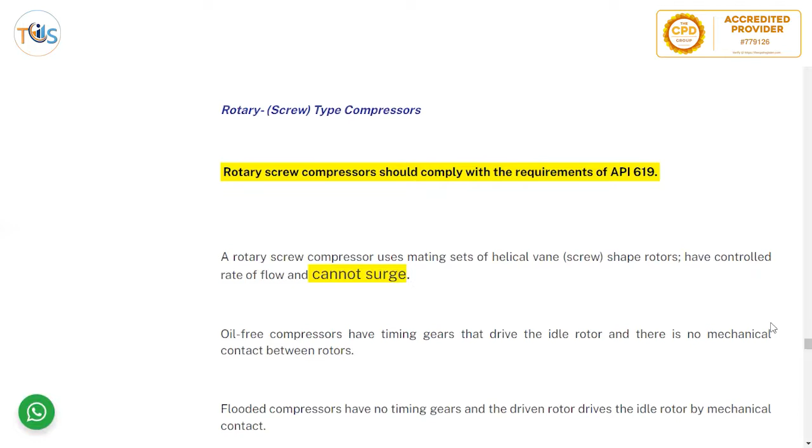Rotary type compressors should comply with requirements of API 619. A rotary screw compressor uses mating sets of helical vane or screw shaped rotors, have controlled rate of flow, and cannot surge. So this might be a potential question: what is the rotary screw compressor's standard? It's 619. And which compressor cannot surge? That is rotary screw compressors. Oil-free compressors have timing gears that drive the idle rotor, and there is no mechanical contact between the rotors.

Flooded compressors have no timing gears, and the driven rotor drives the idle rotor by mechanical contact. As you can see, there are two rotors, one male, one female. No contact between them, and known volume is moved from inlet to outlet.

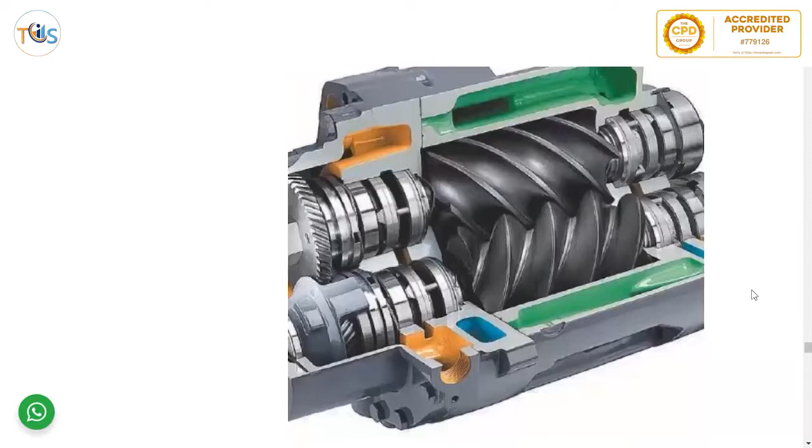And this is the cross section. There's the rotors and the bearings at both ends. Known volume is moved around, and hence it cannot surge, because even with cavitation, it works on volume, so there's no returning back. Because of no contact, there is no wear and tear.

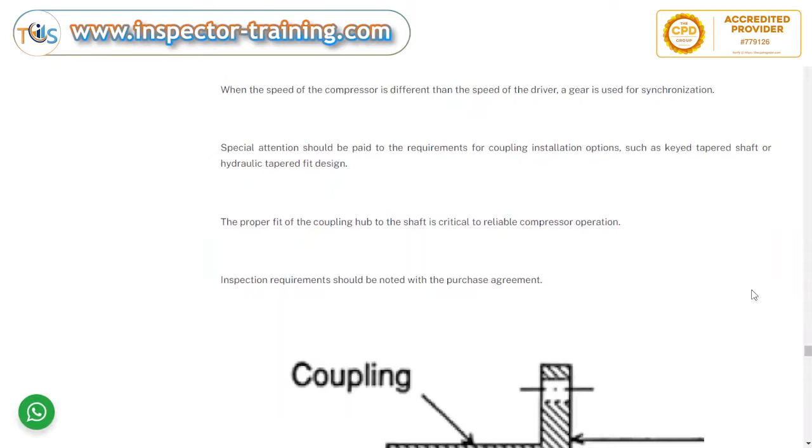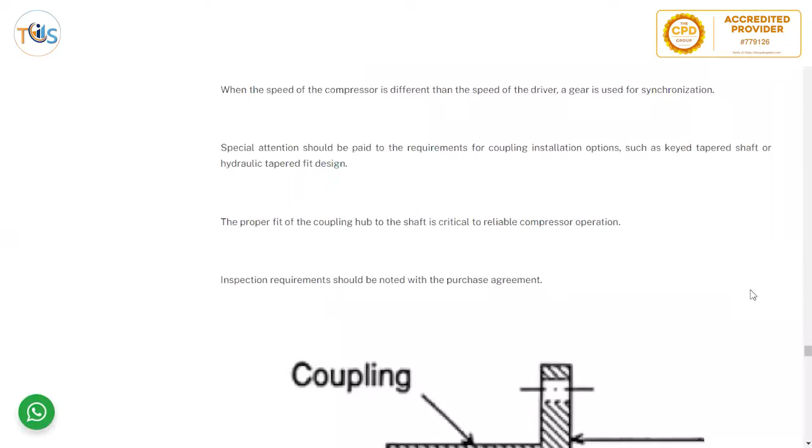Rotary compressors are driven by electric motors, gas or steam turbines, or diesel engines. When the speed of the compressor is different than the speed of the driver, a gear is used for synchronization. Special attention should be paid to the requirements for coupling installation options, such as keyed tapered shaft or hydraulic tapered fit design. The proper fit for coupling hub to the shaft is critical to reliable compressor operation. Inspection requirements should be noted with the purchase agreement.

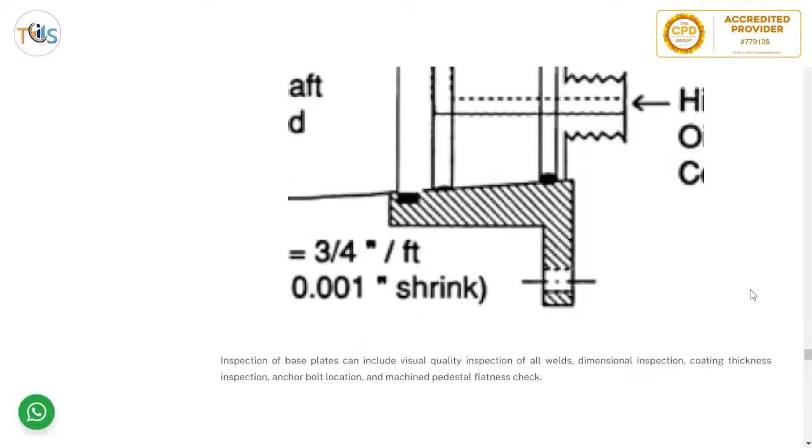So you've got a coupling here, a shrink fit. The inspection of base plate can include visual quality inspection of all welds, dimensional inspection, coating thickness inspection, anchor bolt location, and machined pedestal flatness check.

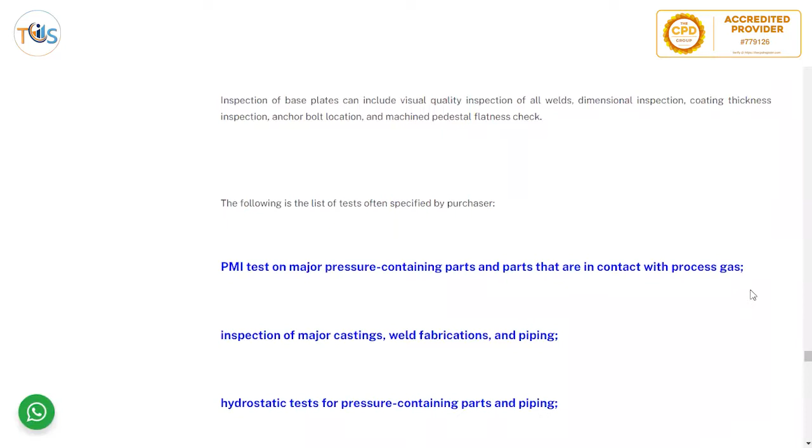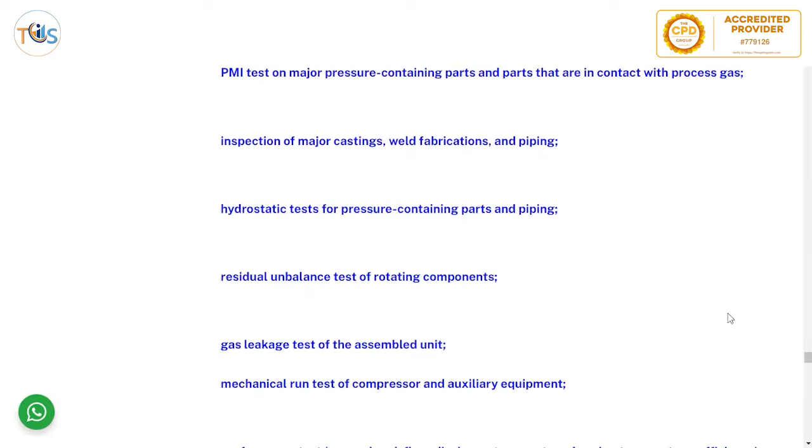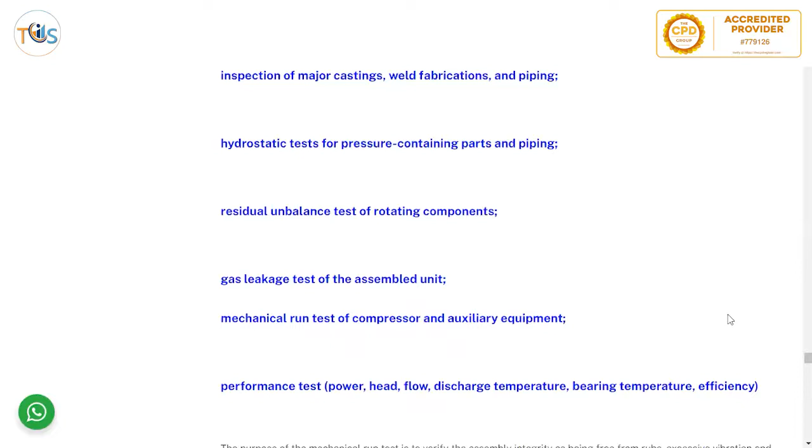The following is a list of tests that can be specified by purchaser: PMI of major pressure containing parts, inspection of major castings, weld fabrication and piping, hydrostatic test for pressure containing parts and piping, residual unbalance test of rotating components, gas leakage test of the assembled unit, mechanical run test of compressor and auxiliary equipment, and performance test: power, head, flow, discharge temperature, bearing temperature, and efficiency.

The purpose of the mechanical run test is to verify the assembly integrity as being free from rubs, excessive vibration and noise, lubricant leaks, and overheating. The source inspector will typically observe the run test in accordance with the agreed test procedure. The source inspector should verify that the results of tests are correctly documented.

All required vendor documents are typically submitted according to VDDR, vendor drawing and data requirement, and reviewed and approved by purchaser.

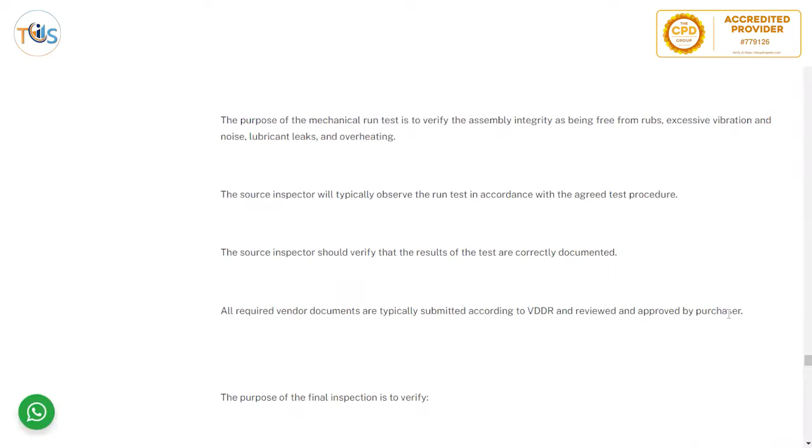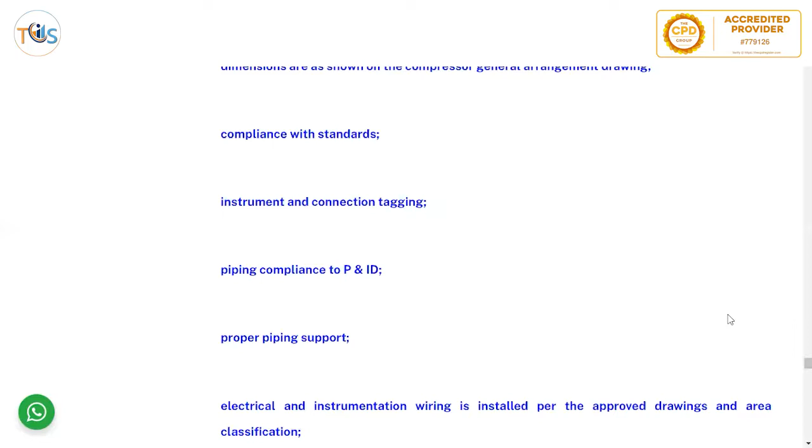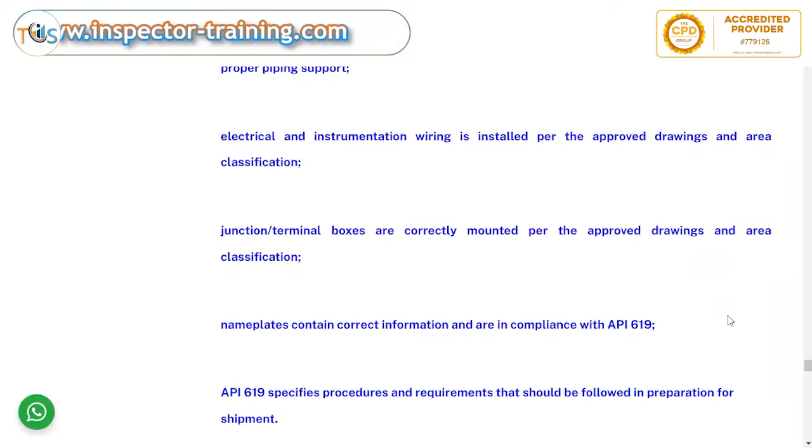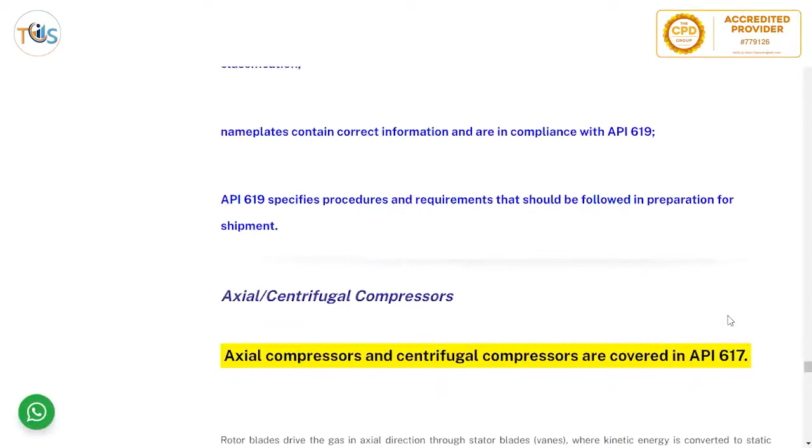The purpose of final inspection is to verify dimensions are as shown on the GA drawing, compliance with the standard, instrument and connection tagging, piping compliance to P&ID, proper piping support, electrical and instrumentation wiring is installed per the approved drawings and area classification, junction terminal boxes are correctly mounted per the approved drawings and area classification, nameplate contains correct information in compliance with API 619, and API 619 specified procedures and requirements that should be followed in preparation for shipment.

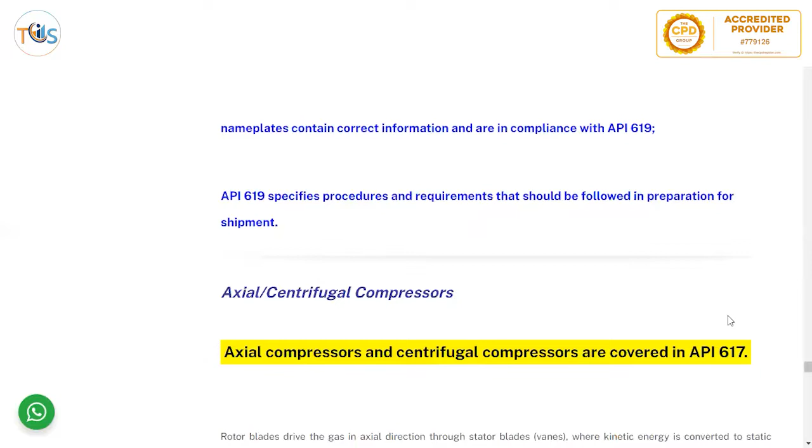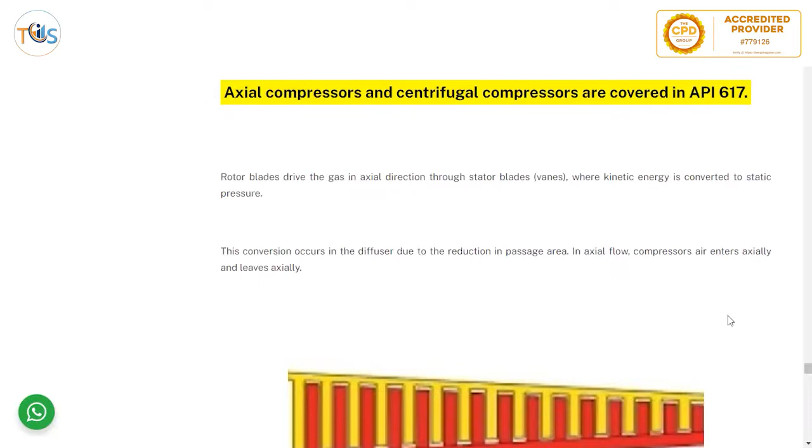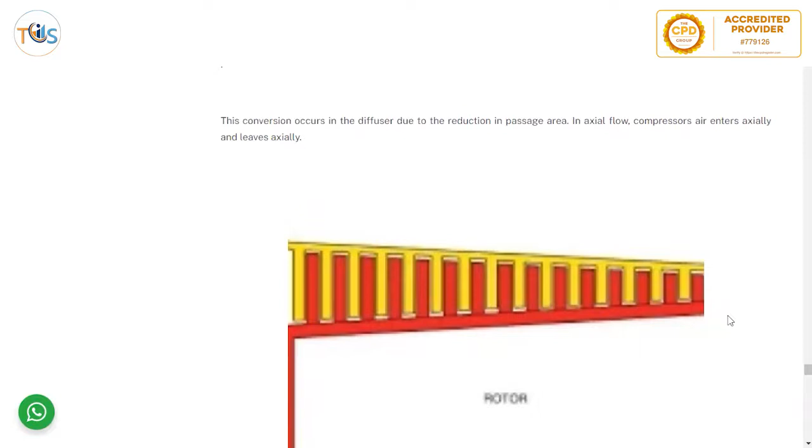Axial centrifugal compressors are covered in API 617. Rotor blades drive the gas in axial direction through stator blades, where kinetic energy is converted to static energy, pressure. The conversion occurs in a diffuser due to reduction in passage area. In axial flow, compressor air enters axially and leaves axially. So as you can see, it comes in, and because there is a reduction in the area, the pressure increases as it moves through.

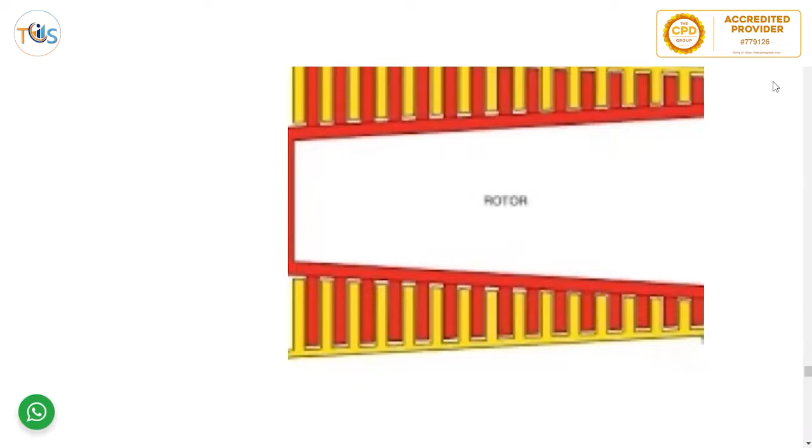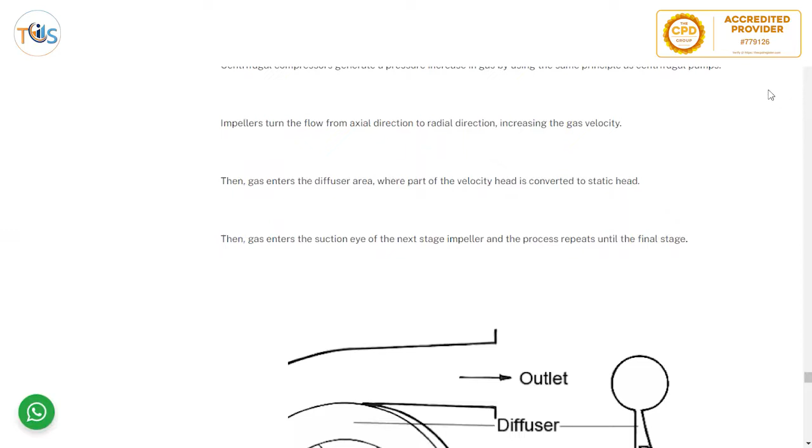So these are the blades. Centrifugal compressor generates a pressure increase in gas by using the same principle as centrifugal pumps. Impellers turn the flow from axial direction to radial direction, increasing the gas velocity. Then gas enters the diffuser area where part of the velocity head is converted to a static head. Then gas enters the suction eye of the next stage impeller, and the process repeats until the final stage.

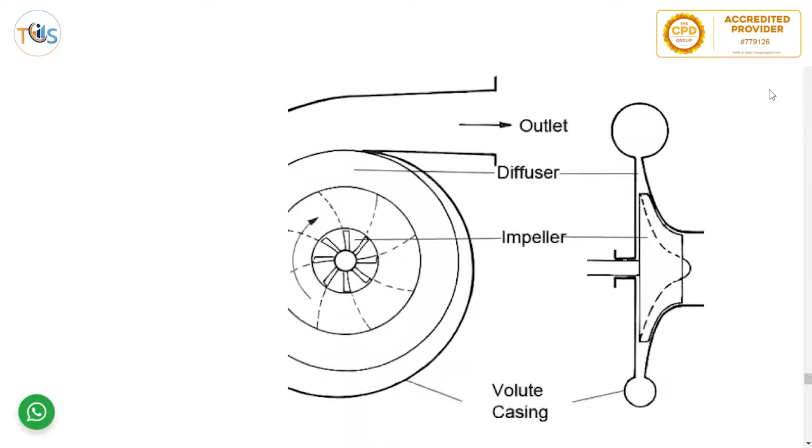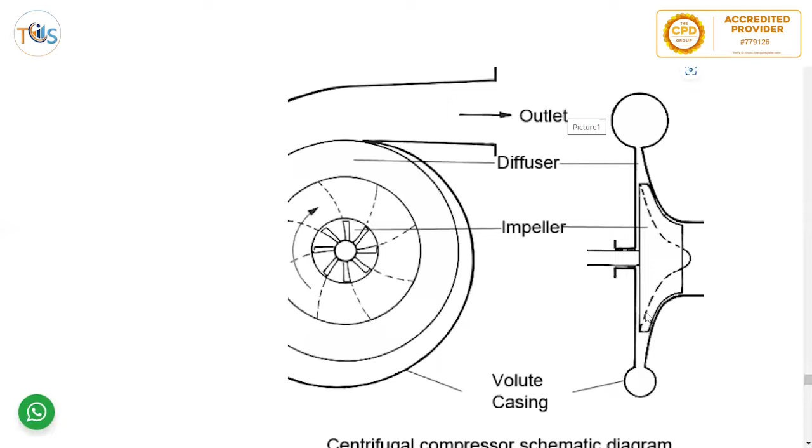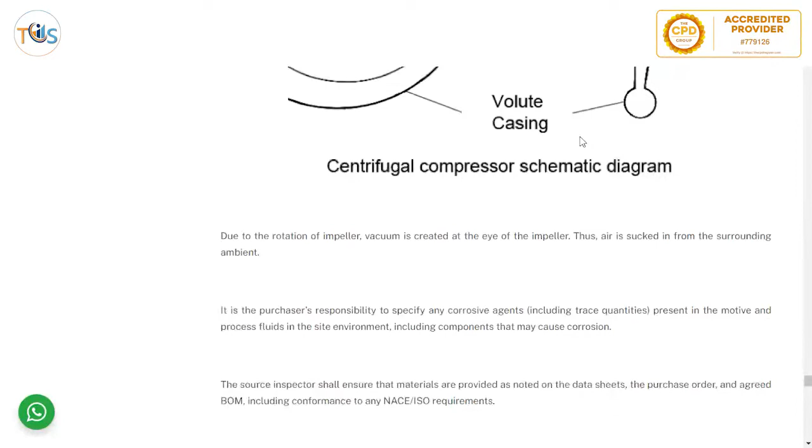So you can see here, you're actually giving velocity to the gas by turning this centrifugal impeller, and by increasing the speed of that, you're giving it some energy. Now, that energy turns into head or pressure. Due to rotation of the impeller, a vacuum is created in the eye of the impeller, thus air is sucked in from the surrounding ambience. It is the purchaser's responsibility to specify any corrosive agent, including trace quantities present in the motive and process fluids in the site environment.

Including components that may cause corrosion, because that affects the type of material selected. The source inspector shall ensure that materials are provided as noted on the data sheet, the purchase order, and agreed BOM, bill of materials, including conformance to any NACE or ISO requirements.

The inspector shall ensure that all carbon and low alloy steel pressure containing components for low temperature service, including nozzles, flanges, and weldments, are impact tested.

API 617 requires the supplier to obtain purchaser approval for any major repair of pressure containing parts.

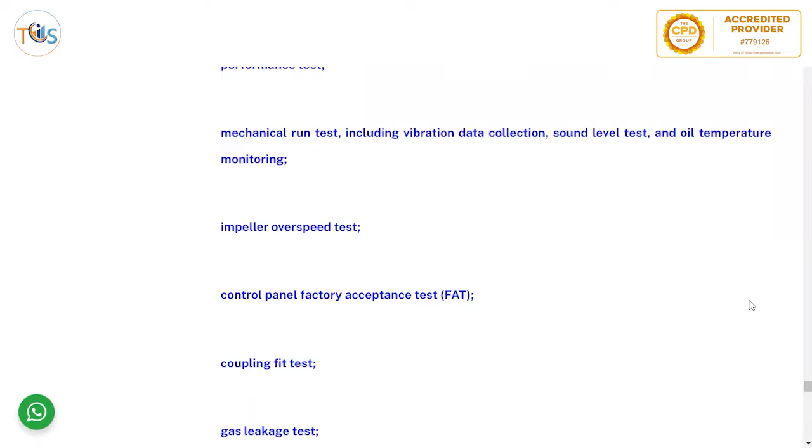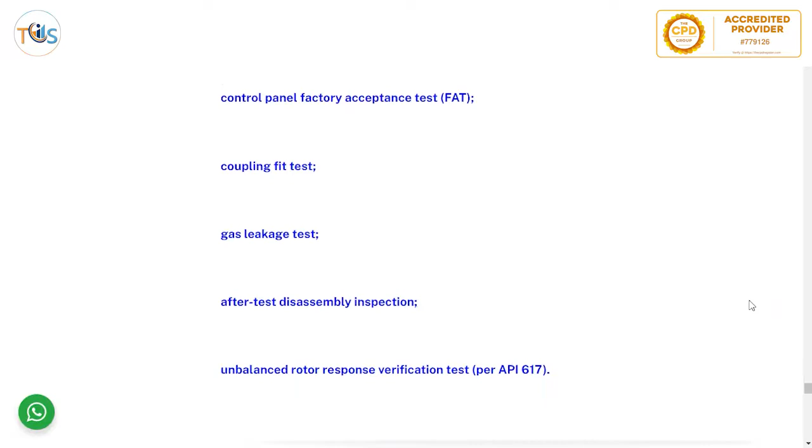Testing of axial and centrifugal compressors should be noted in the purchase order and may consist of the following tests: performance tests, mechanical run tests including vibration data collection, sound level tests, and oil temperature monitoring, impeller overspeed test, control panel factory acceptance test (FAT), coupling fit test, gas leakage test, after-test disassembly inspection, and unbalanced rotor response verification test per API 617.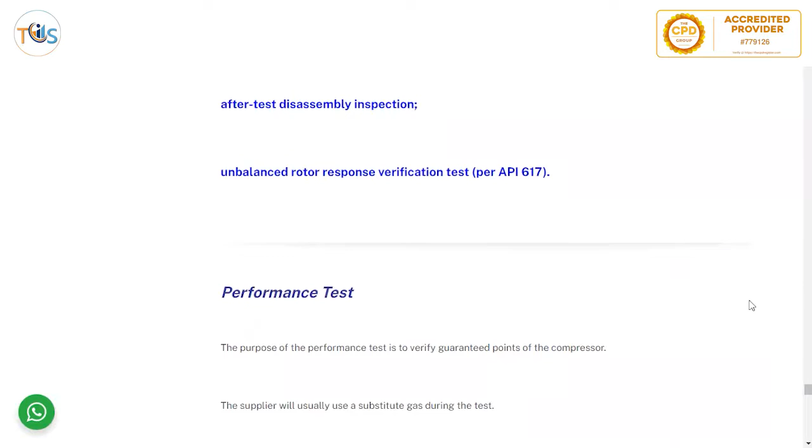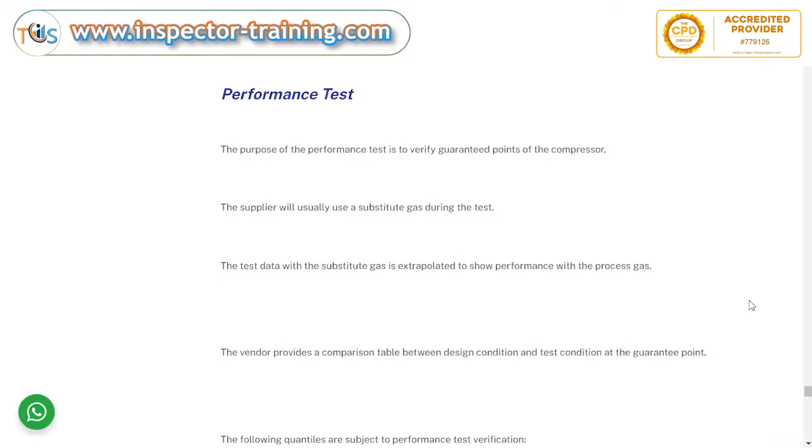The purpose of the performance test is to verify guarantee points of the compressor. The supplier will usually use a substitute gas during the test, and the test data with the substitute gas is extrapolated to show performance with the process gas. The vendor provides a comparison table between design condition and test condition at the guarantee point.

The following quantities are subject to performance test verification: quantity of gas delivered, pressure rise, head, shaft power required, efficiency, surge point, and choke point.

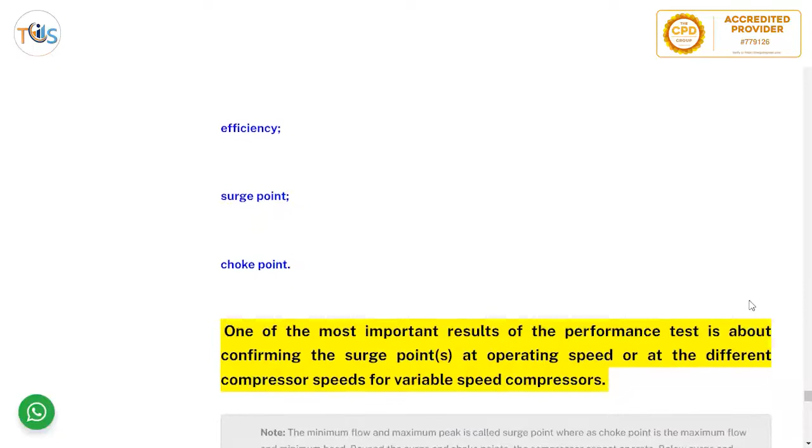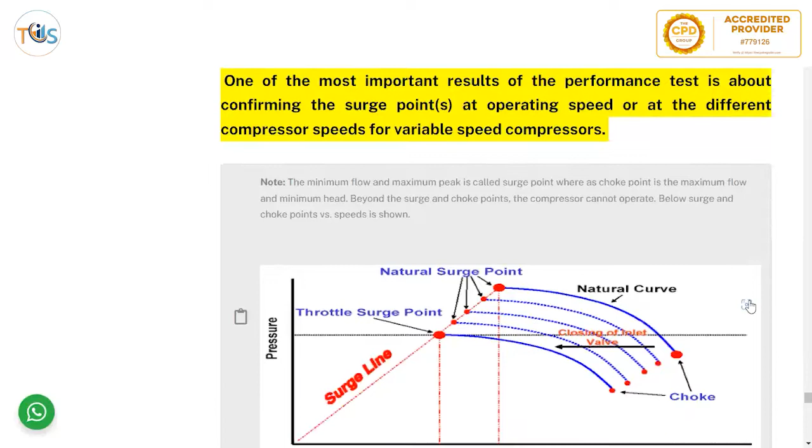One of the most important results of the performance test is confirming the surge point at operating speed, or at different compressor speeds for a variable speed compressor. The minimum flow and maximum head is called the surge point. Whereas the choke point is the maximum flow and minimum head - it's just the other way around.

Beyond the surge and choke points, the compressor cannot operate. Below surge and choke points, versus speeds is shown here. As you can see, there's a chart for pressure and flow versus head, with two lines: minimum flow and maximum head, which is the surge point, and maximum flow but minimum head, which is the choke point. This is the natural curve - you should operate between them. The operating condition should be somewhere between surge and choke.

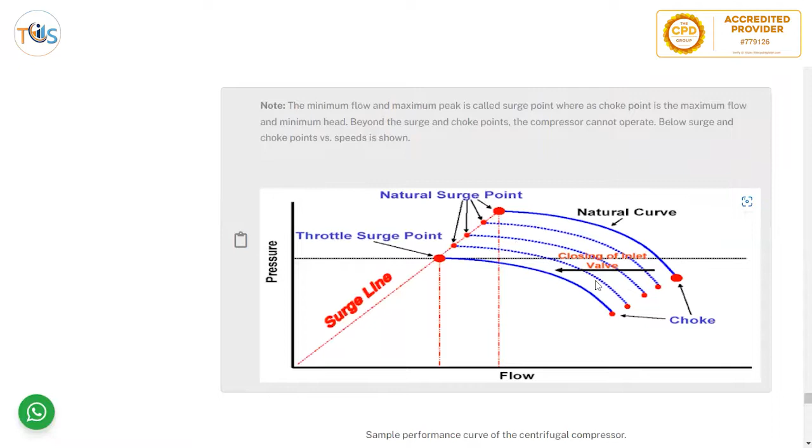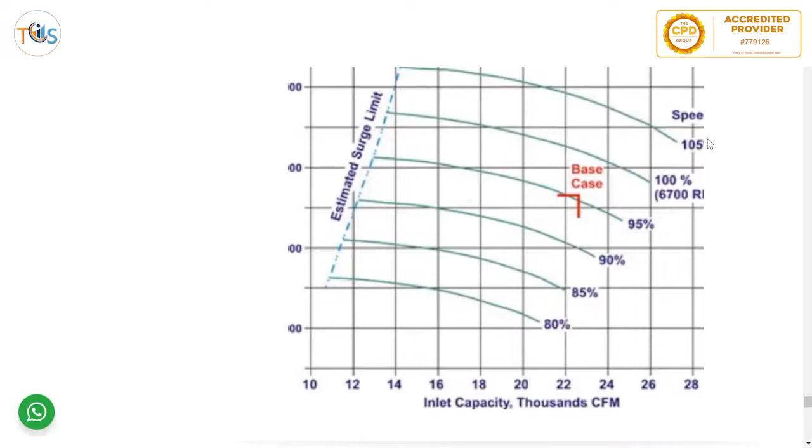This is another example, an ammonia refrigeration compressor, showing the estimated surge limit for the first stage.

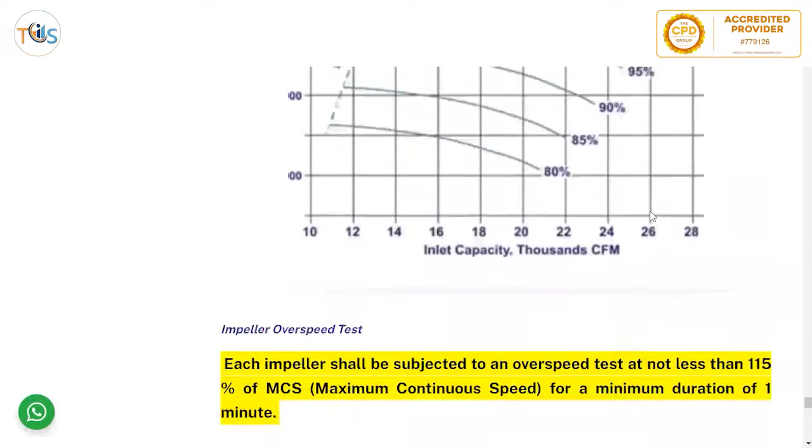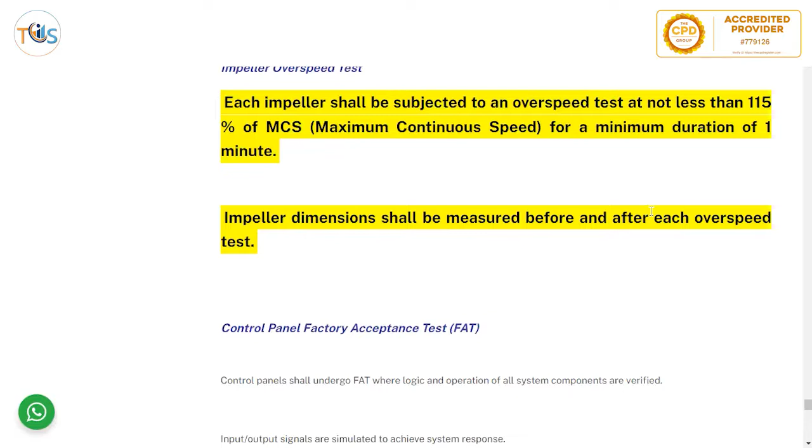Impeller overspeed test: each impeller shall be subjected to an overspeed test not less than 115% of MCS, maximum continuous speed, for a minimum duration of 1 minute. Impeller dimensions shall be measured before and after each overspeed test.

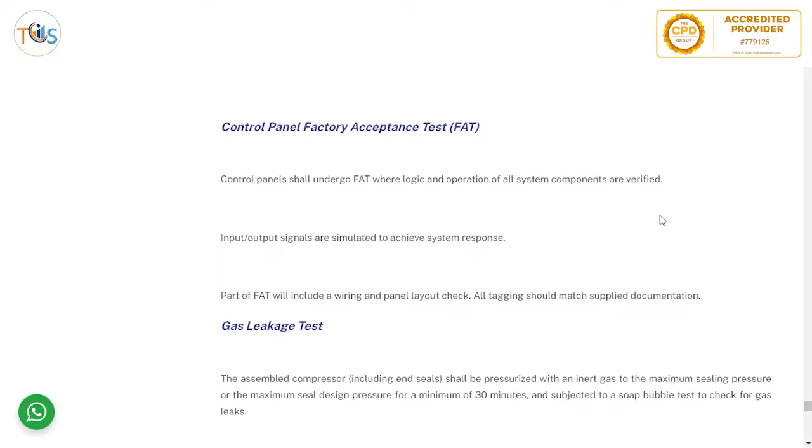Control panel factory acceptance test. It undergoes a FAT, where logic and operation of all system components are verified, and input-output signals are simulated to achieve system response. Part of the FAT includes a wiring and panel layout check, and all tagging should match supplied documentation.

There is also a gas leakage test. The assembled compressor, including end seal, shall be pressurized to the maximum sealing pressure or the maximum seal design pressure for a minimum of 30 minutes and subjected to a soap bubble test to check for gas leaks. The gas test shall be performed after the post-test inspection: disassembled, inspected, and reassembled.

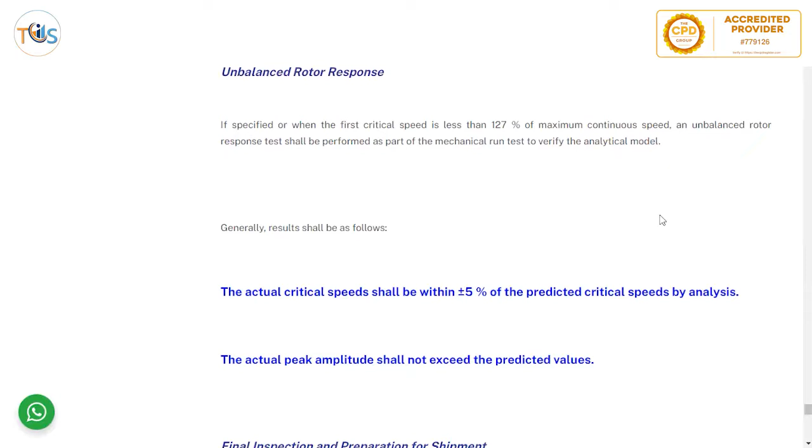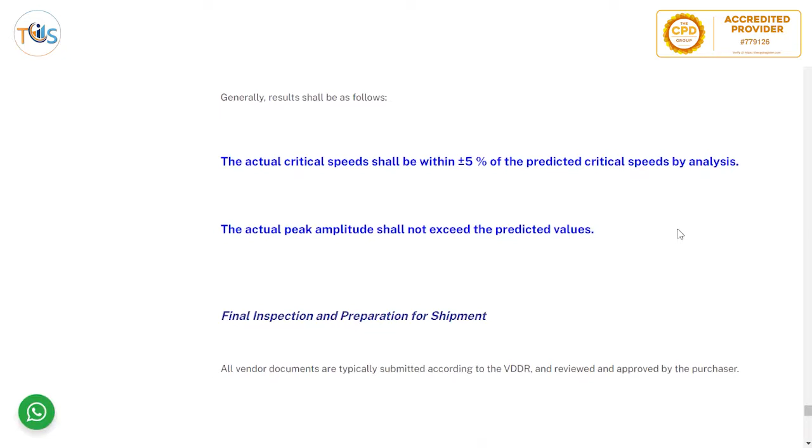Unbalanced rotor response test, if specified, or when the critical speed is less than 127% of maximum continuous speed, shall be performed as part of the mechanical run test to verify the analytical model. General results shall be as follows: the actual critical speed shall be between plus or minus 5% of the predicted critical speed by analysis, and the actual peak amplitude shall not exceed the predicted values.

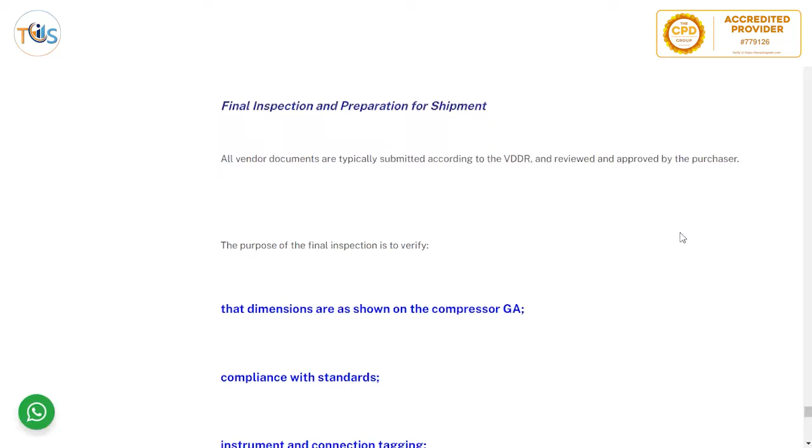Final inspection preparation for shipment. All vendor documents are typically submitted according to VDDR and reviewed and approved by the purchaser.

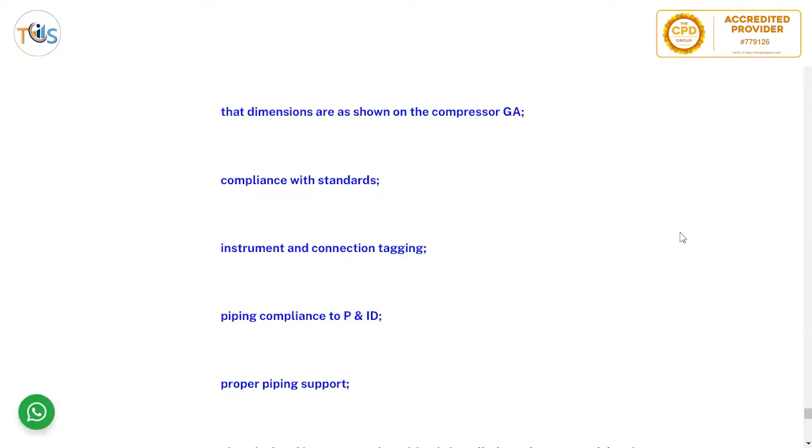The purpose of final inspection is to verify dimensions are as shown on the compressor general arrangement, compliance with standards, instrument and connection tagging, piping compliance to the process and instrumentation diagram, proper piping support, electrical and instrumentation wiring installed per approved drawing, and junction and terminal boxes correctly mounted as per the approved drawings.

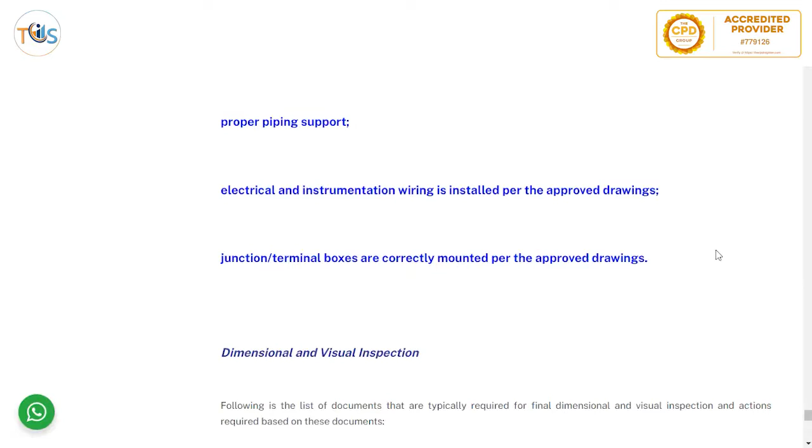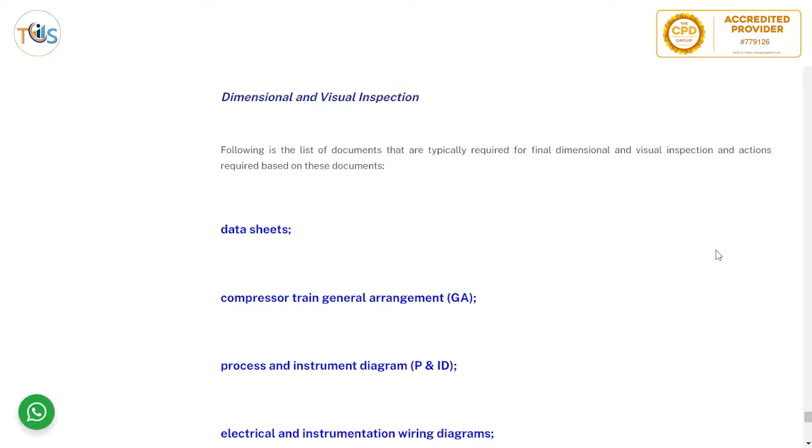Dimension and visual verification typically required for final dimensional and visual inspection, and action required based on these documents: data sheets, compressor train general arrangement, P&ID, electrical and instrumentation wiring diagram, auxiliary general arrangement, P&ID and BOM (bill of material), seal reservoir, lube oil system, seal, driver, junction box, gearbox, and packing list.

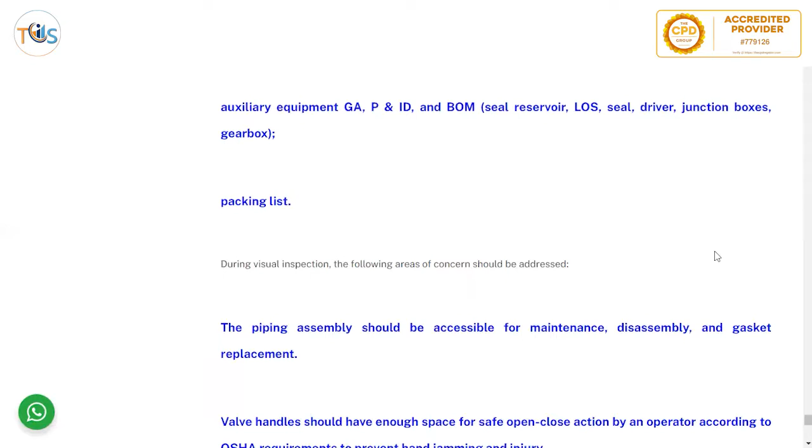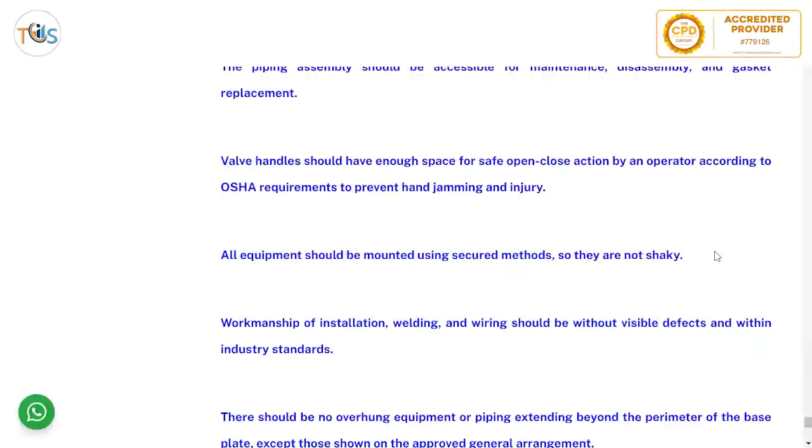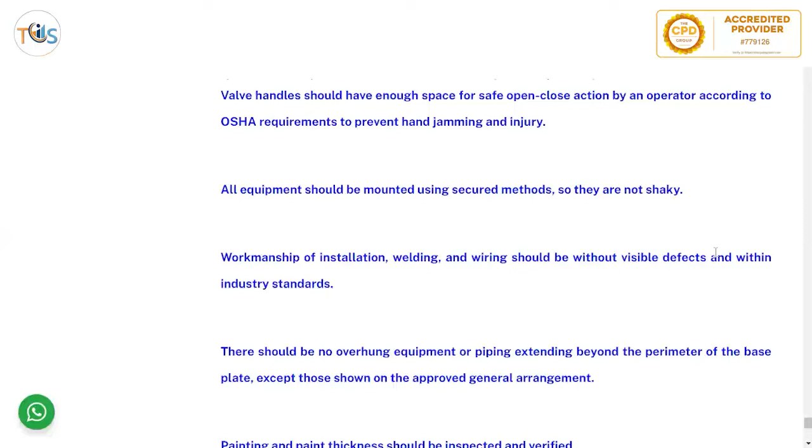During visual inspection, the following areas of concern should be addressed. Piping assembly should be accessible for maintenance, disassembly, and gasket replacement. Valve handles should have enough space for safe open-close action by an operator according to OSHA requirements to prevent hand jamming and injury. All equipment should be mounted using secured methods so they are not shaky.

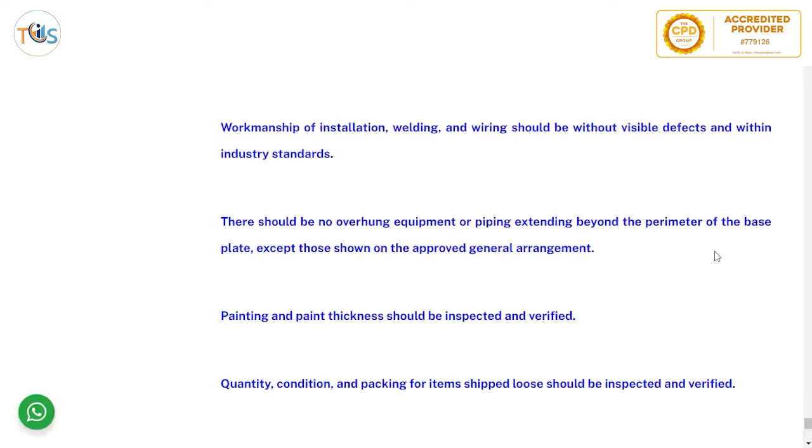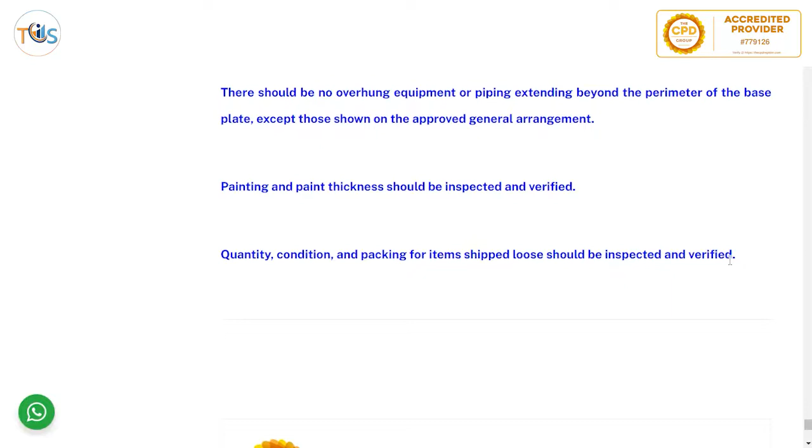Workmanship of installation, welding, and wiring should be without visible defects and within industry standards. There should be no overhung equipment or piping extending beyond the perimeter of the base plate except those shown on the approved general arrangement. Painting and paint thickness check shall be inspected and verified, and quantity, condition, and packing for items shipped loose should be inspected and verified.